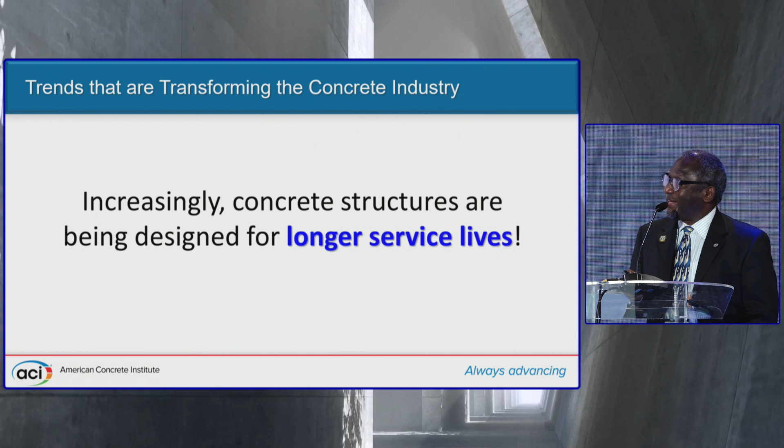So the key thing in that particular situation is we need to make sure these structures are durable, because durability essentially implies that we would have increased service life, minimal repairs, which is very critical, and also that implies a reduction in the use of natural resources.

We look at the depletion of sand, for example, in India. We heard yesterday morning during the keynote presentation that there's a depletion of sand in India, but they still have to make concrete, so they need to look at other ways of doing so.

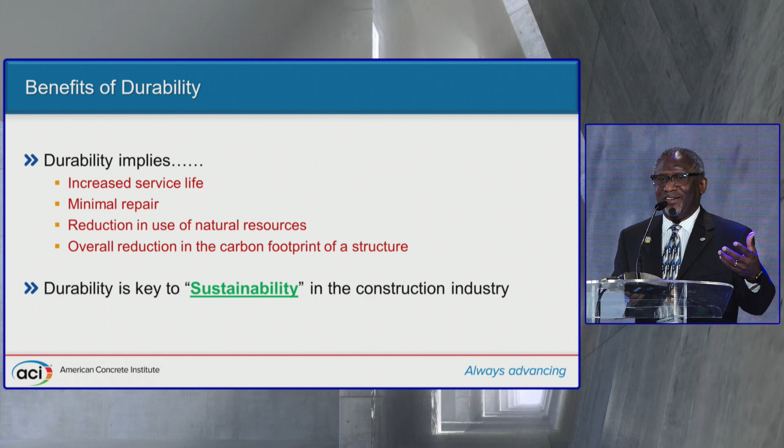The bottom line is what we're aiming for is an overall reduction in the carbon footprint of a structure. So essentially, durability is very key to sustainability in the concrete industry. I think this has pretty much been what you've heard over the past two days, because I remember very well Dr. Akio Kasuga basically said the same thing two days ago, and then we had the same thing yesterday.

So it's a common theme that you're going to hear, that durability is very much key to sustainability in the concrete industry. Now, when you talk about sustainability, it means a whole lot of things to different people. For us as engineers, we focus on durability, but then there are things that we have to be aware of in terms of what it means to other people outside of our circles.

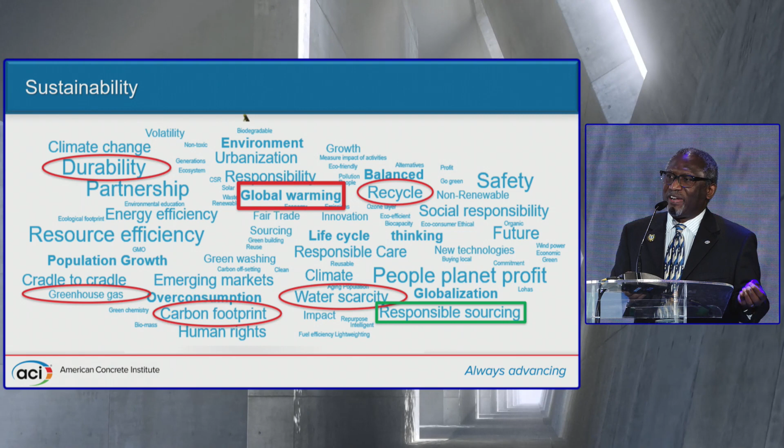Global warming is one of the things that a lot of people equate sustainability to. Greenhouse gas emissions, water scarcity, recycling, responsible sourcing—these are all things that other people typically will focus on. And when we talk about water scarcity, it is a real thing.

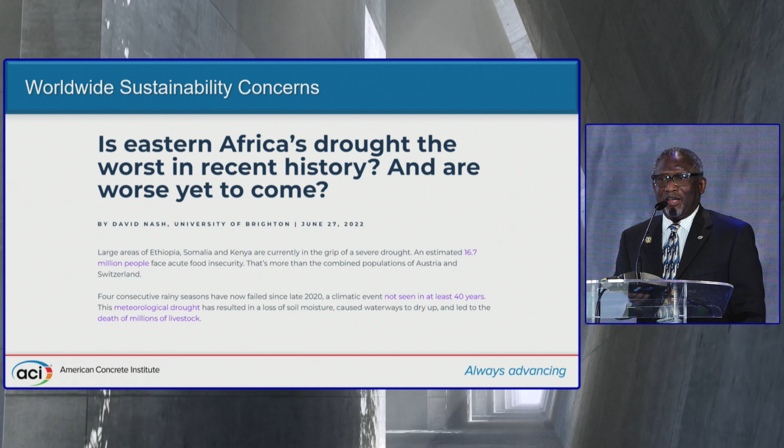This was something I just picked up yesterday—a report published back on June 27th this year about a severe drought that exists in East Africa. And it's not just in East Africa; we have drought situations in a whole lot of different places.

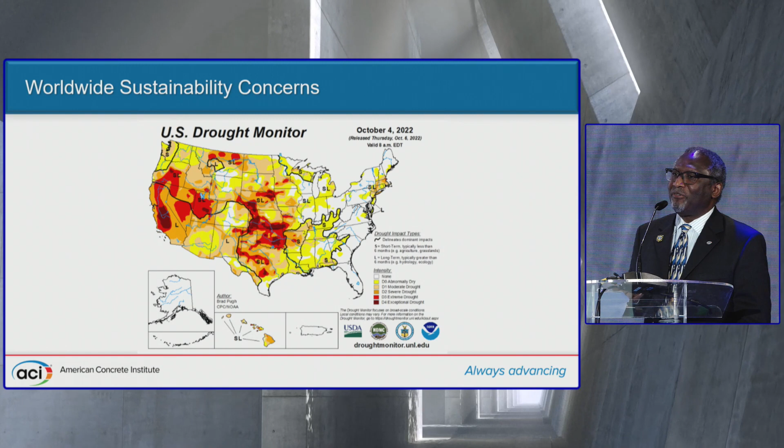Lake Mead in Nevada, for example, is at its lowest level ever, and it supplies water to a whole lot of different areas. So water scarcity is something that we should not take lightly at all.

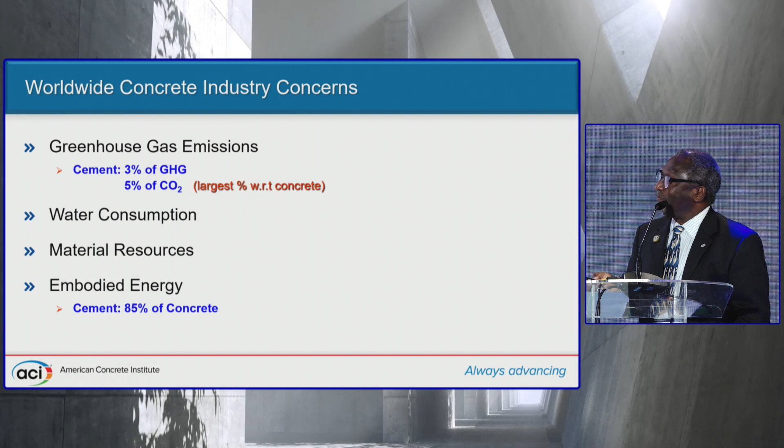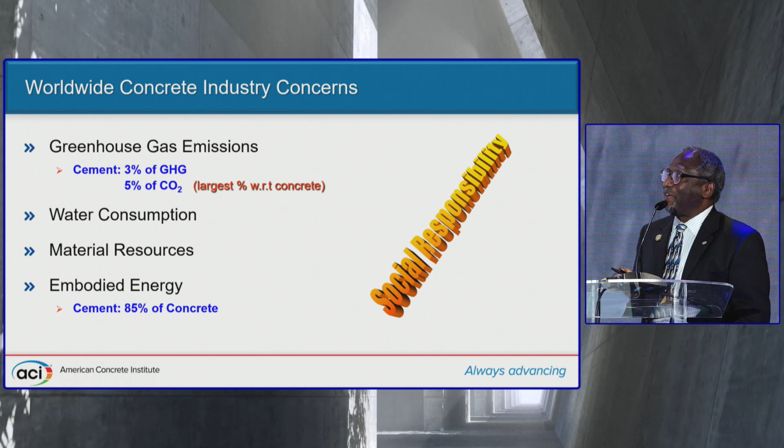Now, when we look at the worldwide concrete industry concerns, basically I group them into these four: greenhouse gas emissions, water consumption, material resources, as well as the embodied energy of concrete. Those are some of the main concerns currently. And along with that, we have a social responsibility to use materials and to use concrete in a very sustainable way as much as possible.

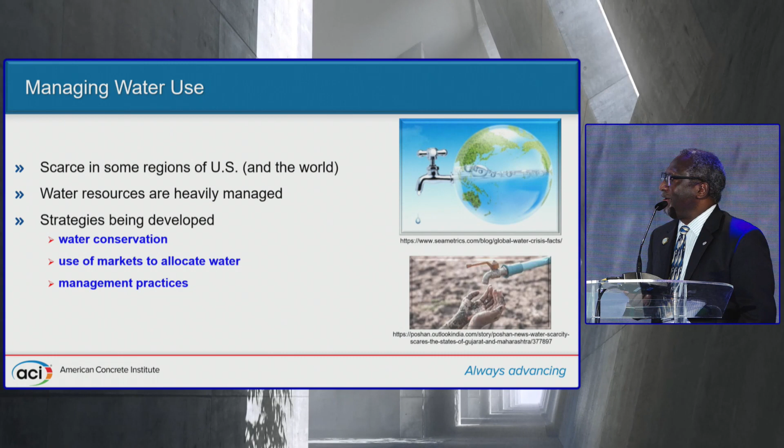Now, I talked about managing water use and the scarcity in some regions. As a result, there are strategies that are being developed for water conservation. In some places, like California, for example, they cannot use water to water their lawns, mainly because of the water scarcity. So these are things we need to be aware of.

Now, here's the good news: the concrete industry has actually been doing quite well when it comes to this, mainly through the use of superplasticizers or high-range water-reducing admixtures.

Now, this was an analysis that I did way back in 2008. I haven't bothered to update it—it will be even more profound if I were to extend it to 2022. But what I ended up doing was essentially a calculation on the mix water savings that we get from using high-range water-reducing admixtures or superplasticizers.

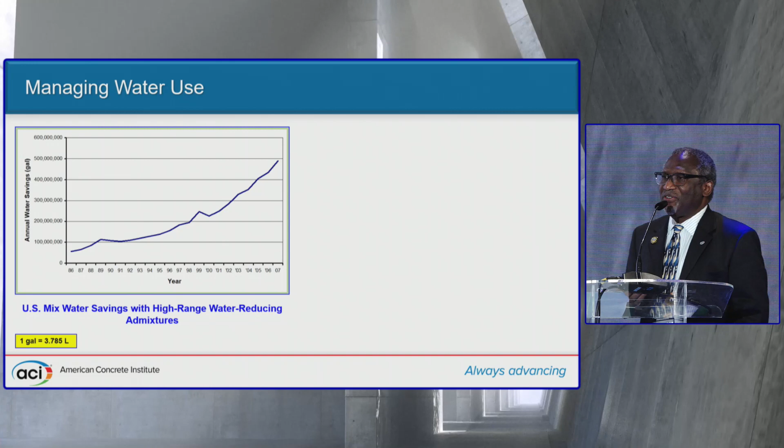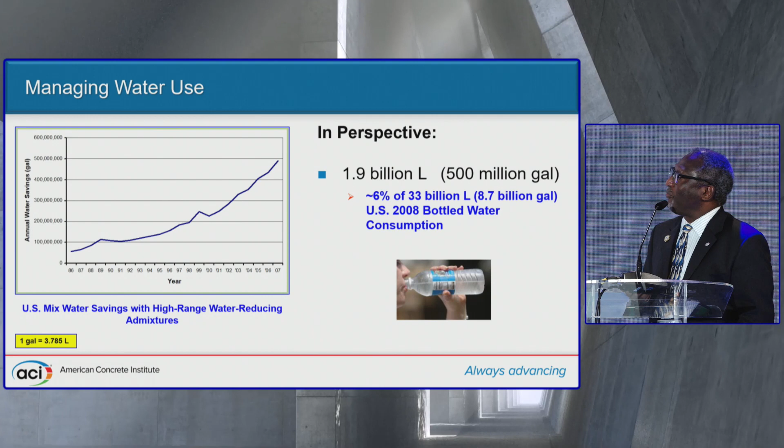And it's quite significant. The annual savings was approximately 1.9 billion liters, and back in 2008 that was about 6% of the 33 billion liters of bottled water consumed in the United States. That's quite a bit. Cumulatively, if I look at the analysis from 1986 through 2007, that amounts to about 17.4 billion liters, or approximately 53% of the bottled water consumption back in 2008 in the United States.

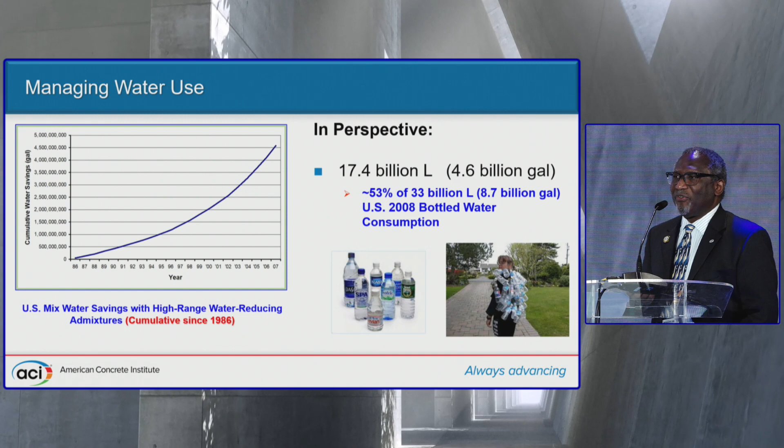Now, if we were to do this globally, it would really be an astounding number. So that said, water-reducing admixtures essentially help enable the judicious use of one of the most precious natural resources in the world, which is water. And that's being socially responsible.

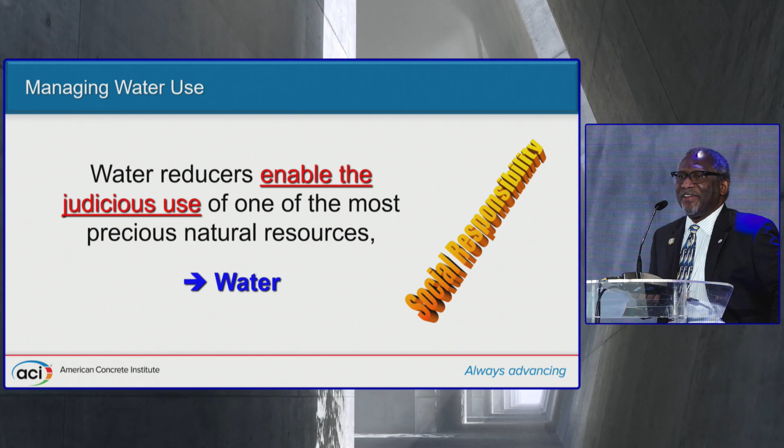So in as much as people talk about concrete being a bad animal sometimes with respect to carbon emissions, we have to be proud of the fact that we are doing some things that are actually also helping society.

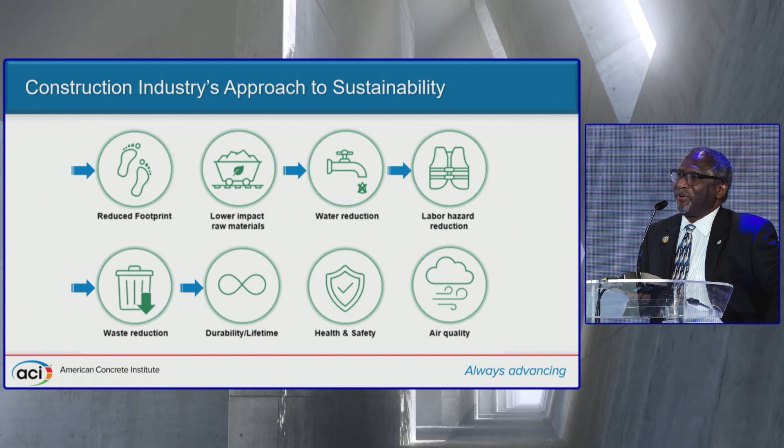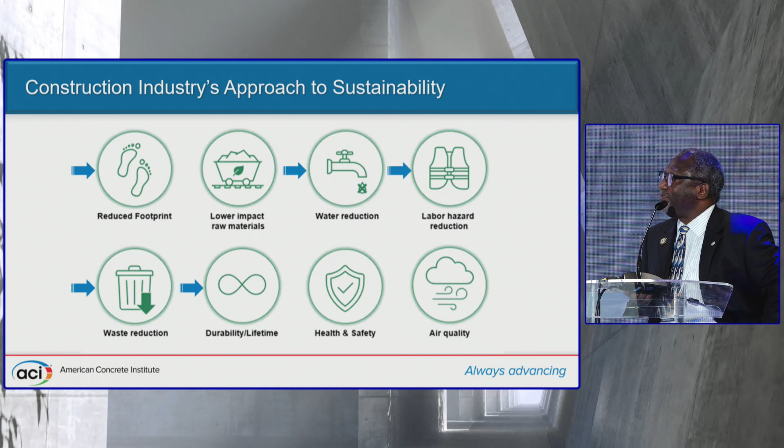The construction industry's approach to sustainability typically focuses on several key buckets. Obviously, reducing the carbon footprint of concrete is one of the key things. Another is using lower impact raw materials so we don't deplete natural resources. I already talked about water reduction. Things such as labor hazard reduction are also very critical, making job sites safer for workers, reducing waste, and obviously durability over the lifetime of a structure, as we've been talking about over the past couple of days. Other things such as health, safety, and air quality are also very important.

With all of this, there are different options. One of the things we have to be very careful about is something called greenwashing, which is when people make claims that cannot be substantiated. So when it comes to sustainability, one of the things we have to do is be able to quantify whatever claims we're making.

Life cycle assessment typically looks at the environmental portion, but in order to incorporate the economic portion, we normally would go to eco-efficiency analysis. So it's a more comprehensive way of doing it.

One of the things going on currently in terms of being able to quantify or look at different alternatives is environmental product declarations, or EPDs. These EPDs are nothing more than the equivalent of nutrition labels for concrete. Right now, when you go to the supermarket and buy a box of cereal or some canned produce, they have a nutrition label on it. It's exactly what we're doing here with concrete.

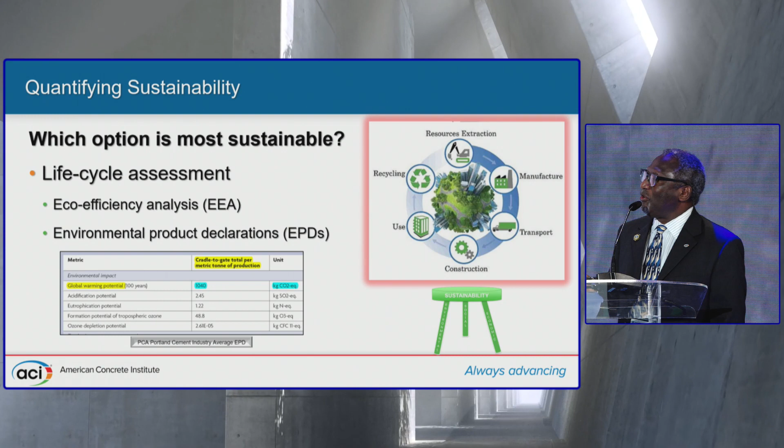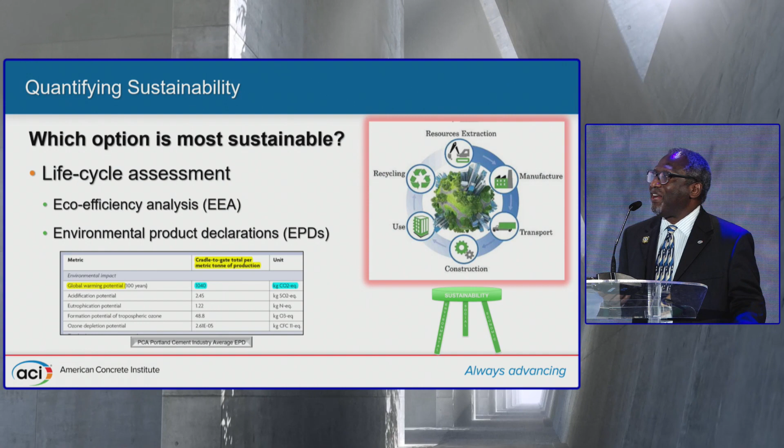But instead of things such as calories and so on, we have global warming potential expressed as kilograms CO2 equivalent, and things such as acidification potential, eutrophication potential, and so on. This is something that as engineers, we need to be aware of in terms of the quantification of sustainability.

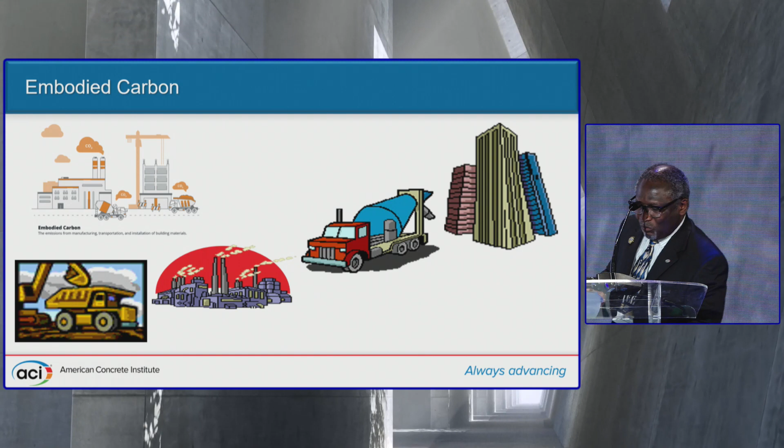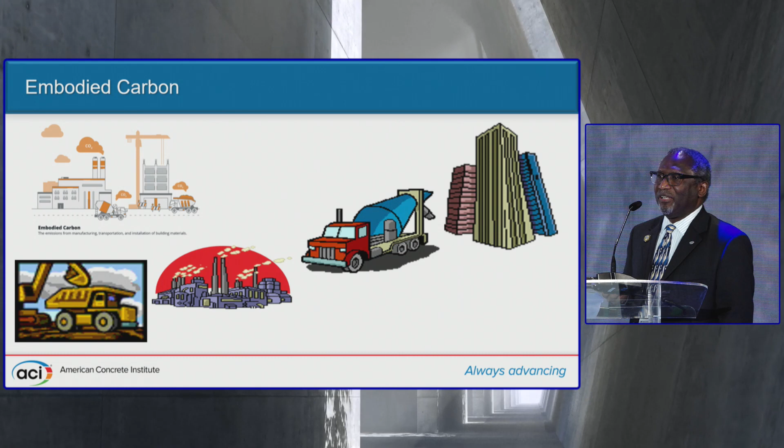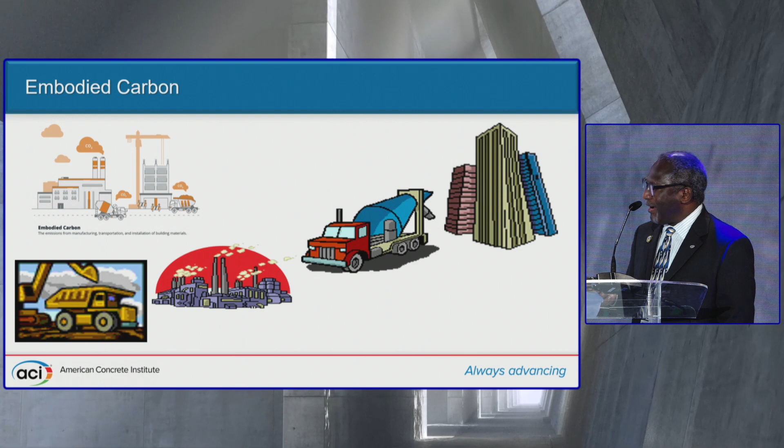We've heard talk about embodied carbon as well as overall carbon. Embodied carbon is essentially the emissions that arise from the extraction, manufacturing, transportation, and installation of building materials. In a very pictorial sense, this is what embodied carbon entails - everything from extraction, the energy associated with extracting materials, all the way through the construction of the building.

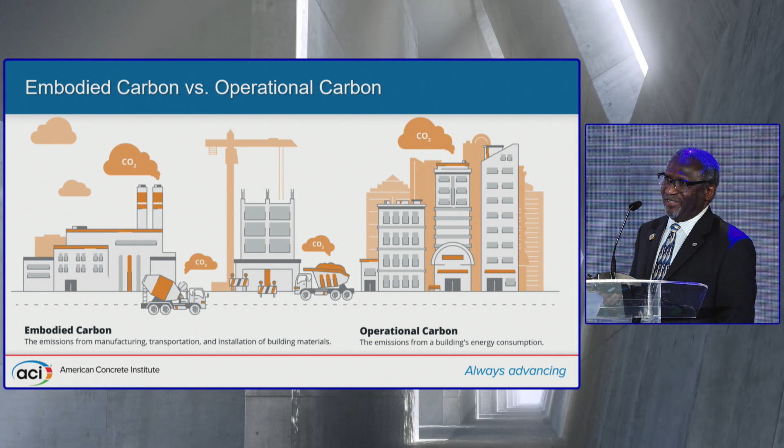Along with that, as Dr. Akio said a couple of days ago, we also have operational carbon. He basically took us through the cost of all of that. That is the carbon associated with emissions from a building's energy consumption.

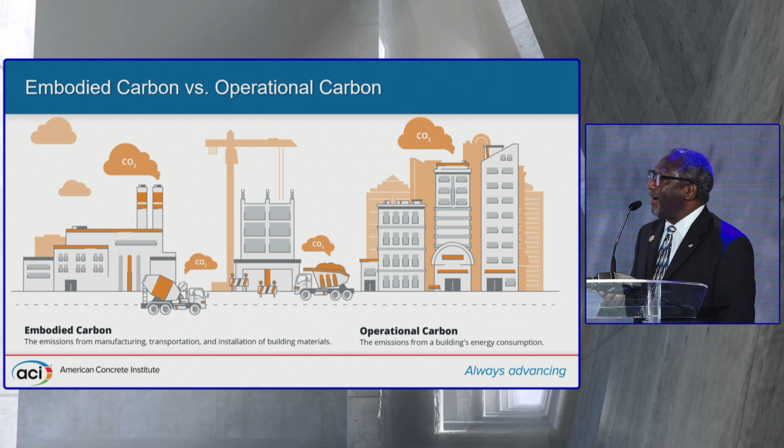We found out yesterday, typically people will do analysis from cradle to gate, or you can have cradle to cradle, so it depends on how the analysis is done. Most of the analysis typically would not include the operational carbon, just the embodied carbon associated with the particular structure.

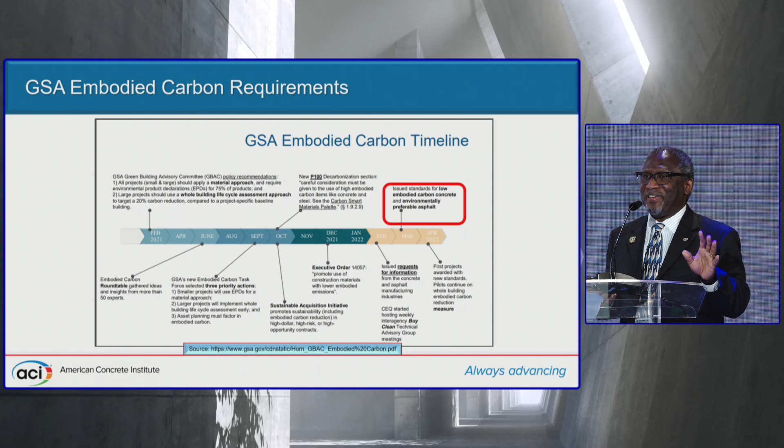Now, why is this important? The General Services Administration, the GSA in the US, basically controls or sets policy for all government buildings. In March of this year, they issued standards for low embodied carbon concrete and environmentally preferable asphalt. So what we have now is a situation where the government is telling us exactly what we want to do. And that's where we don't want to be, because they will set limits that might not be what we actually want.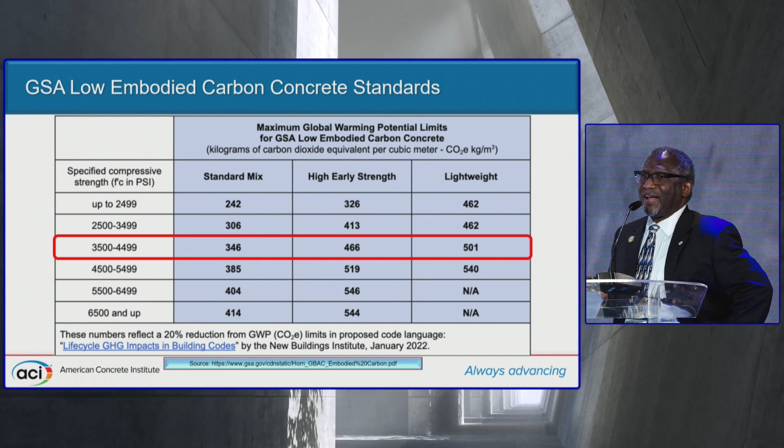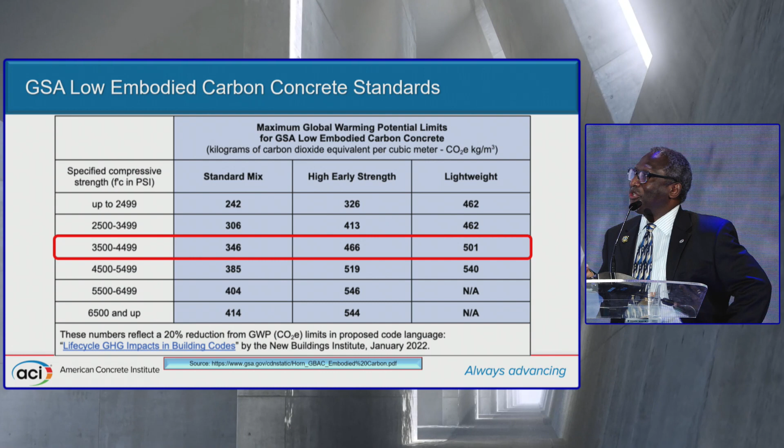The contractor is responsible for making sure that the concrete mixes used in the projects will meet these limits. And what do you think is going to happen? The contractor is essentially going to pass it on to the concrete producer.

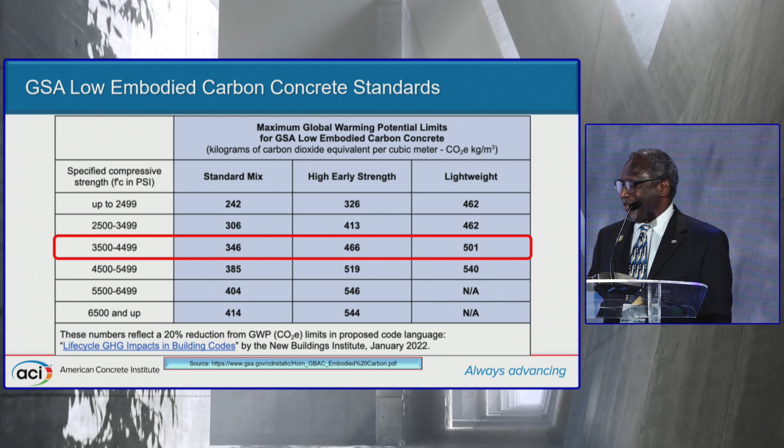I just wanted to make you aware of some of the things happening around the world. I'm not quite sure what's going on in Brazil, but don't be surprised if these things start coming up. So proactively, the question is, what is the concrete industry doing? Because we don't want a situation where we're forced to do something, so we have to take the lead.

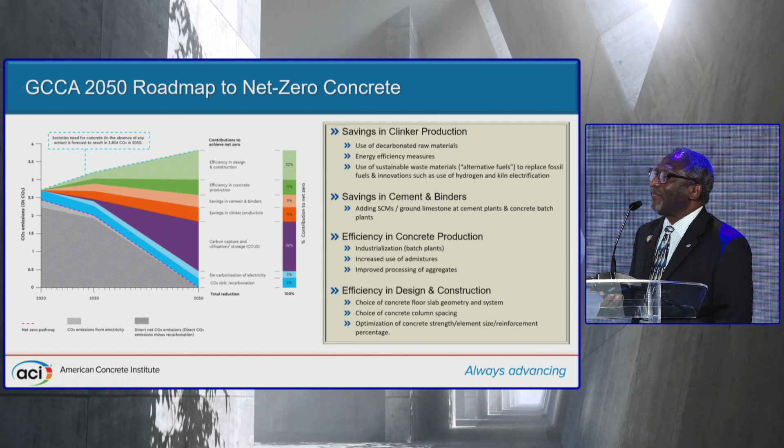With respect to efficiency in design and construction, this essentially goes to structural engineers: the choice of concrete floor slab geometry and system, choice of concrete column spacing, optimization of concrete strength, element size, and reinforcement percentage. These are things that fall in the lap of structural engineers.

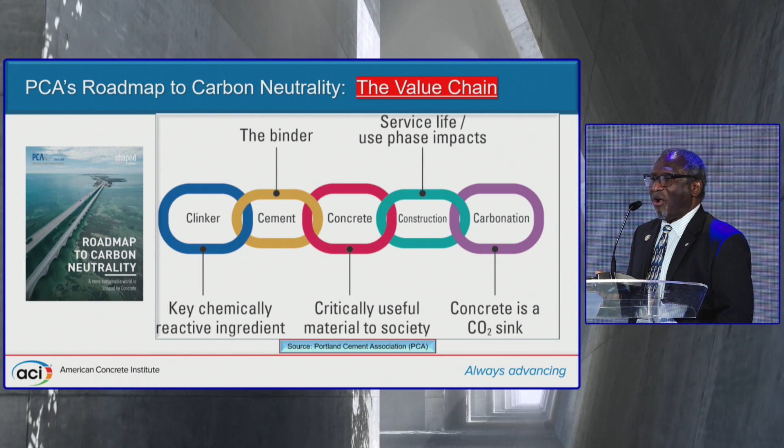The Portland Cement Association, PCA, in the US also has a similar roadmap, much like the one from GCCA, but they call theirs the value chain, the 5 C's: clinker reduction, optimization of cements, concrete, construction, as well as concrete as a carbonation sink.

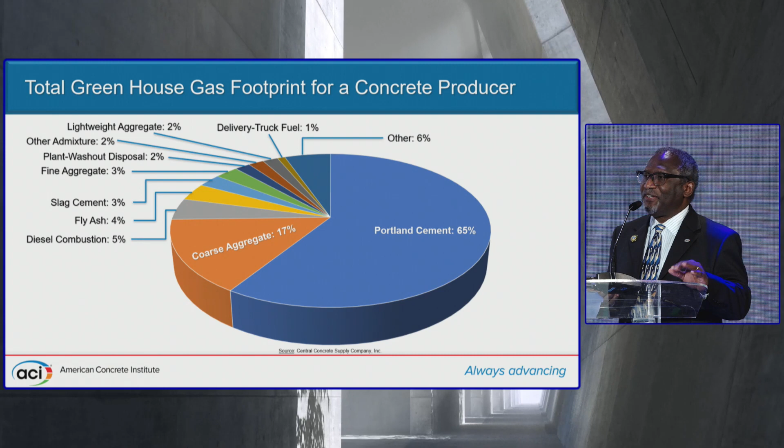Proactively, one of the prominent concrete producers in Northern California got a consultant to analyze their operations and come up with the carbon footprint of their operations. To no surprise, they found that 65% of their carbon footprint is due to the Portland cement, another 17% is due to the coarse aggregates, and the rest of the contributors are all in the single digits.

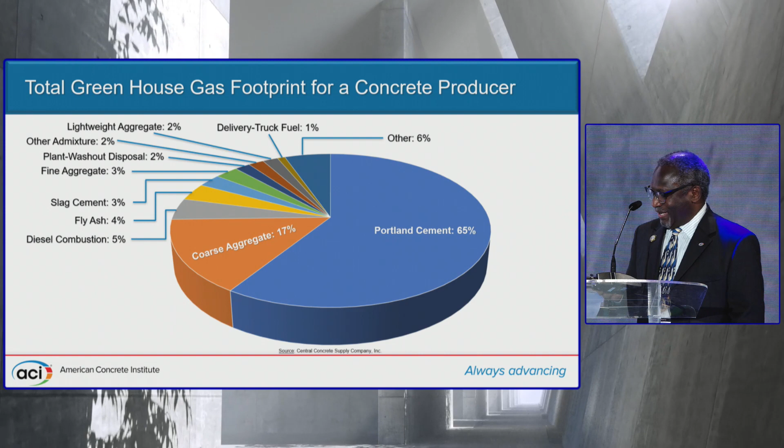Now, what does this mean? Essentially, if we want to reduce the carbon footprint of concrete, we need to look at ways to reduce the clinker factor, or how much cement we're using.

A couple of days ago, Dr. Akio talked about the geopolymer they've devised, where they're using silica fume, slag cement, and fly ash in their geopolymer concrete mixtures. But these are the things that are available, and we have some other materials as well that are coming on the scene.

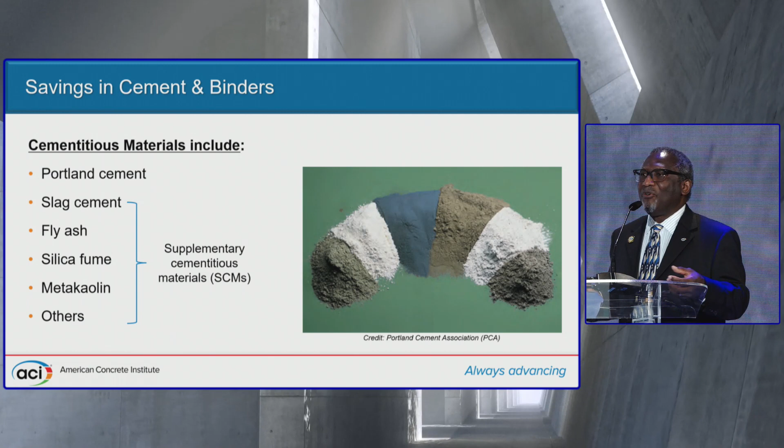Such as ground glass as a pozzolan. So all the beer bottles and liquor bottles that typically go to the landfill are now being harvested and ground into a fine powder, and that material is extremely high in SiO2 content, similar to silica fume.

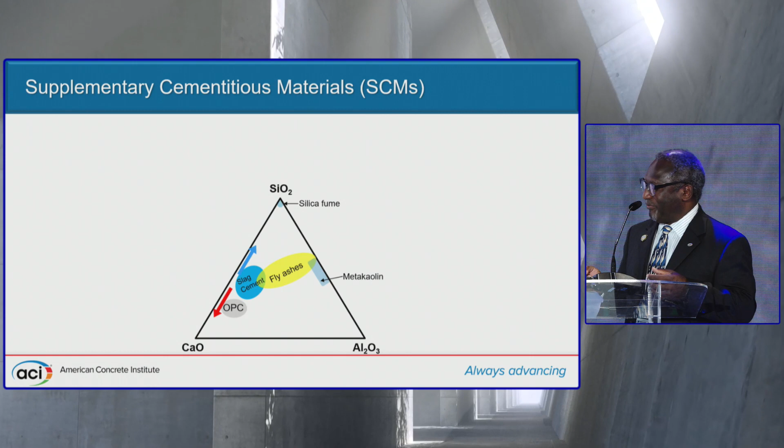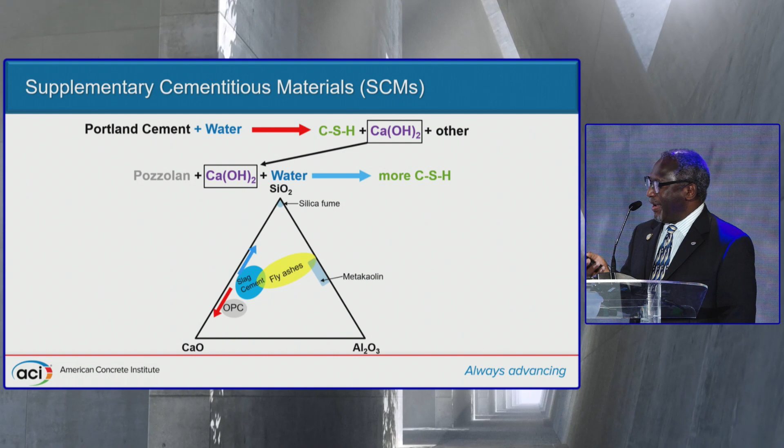As a result of that, it's able to function very much like a pozzolan, and pozzolans, as we know, help to improve the concrete matrix through the formation of additional calcium silicate hydrate gel. So all of these materials are very, very beneficial.

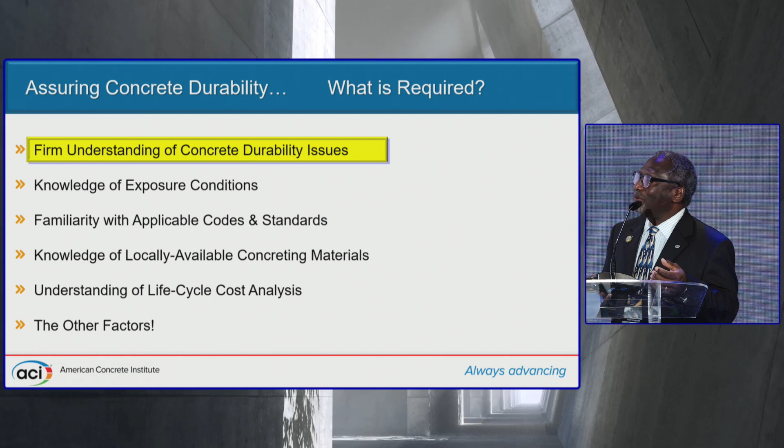Now, this is one thing that I feel very strongly about, and that is, how do we assure concrete durability? From my perspective, I've broken it down into 6 different categories, starting with having a firm understanding of concrete durability issues, knowledge of the exposure conditions, familiarity with applicable codes and standards, knowledge of locally available concreting materials, understanding of life cycle cost analysis, and then what I term the other factors.

So let's take a quick look at some of these things.

Knowledge of the exposure conditions. As civil engineers and designers, we have to be aware of the exposure condition, because then we know exactly how to not just focus on strength, as we had yesterday, but then look at the durability aspects of things.

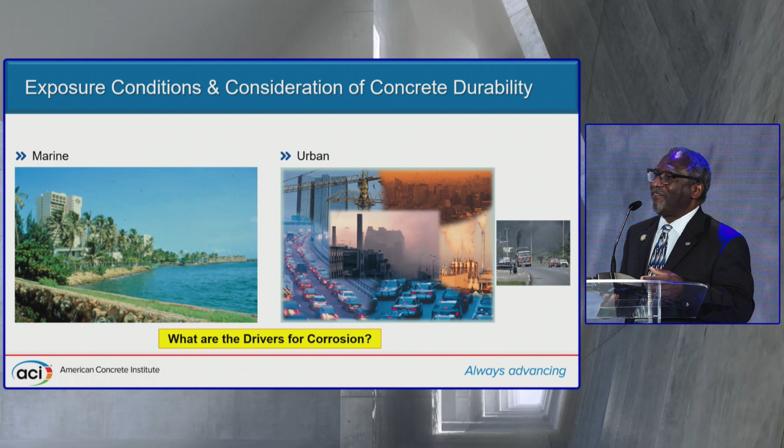Is it close to a marine environment? Is it in a heavily populated area where we have a lot of industrial pollution? Because those are two different things. In one case we have exposure to chlorides, in the other case we have carbonation of the concrete that can also lead to corrosion of the reinforcing steel.

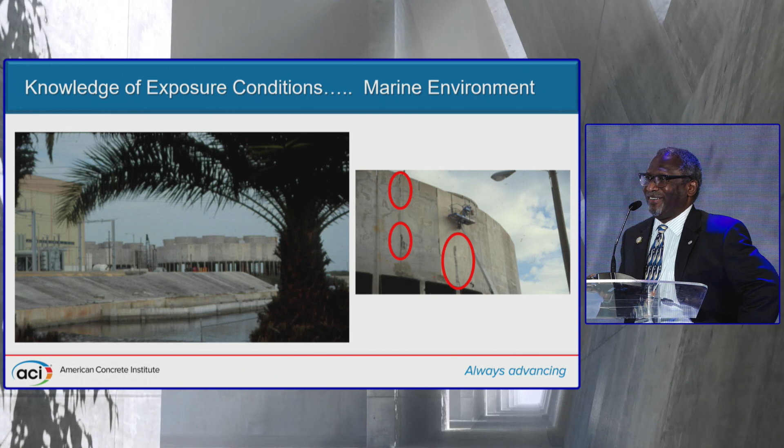This was a cooling tower that I worked on, back in the early 2000s, off the coast of Tampa. At the time when I was there for these repairs, the cooling tower was only about 5 years old, and they had to shut it down for repairs. It's difficult to see here, but all of the columns were badly corroded - you can see some of the corrosion that has already occurred. Within 5 years it had to be repaired. Why was that? They were using seawater as a cooling medium, laden with salt, and that was not taken into consideration in the design of the cooling tower. This is where we have to be aware of where the structures are going to be.

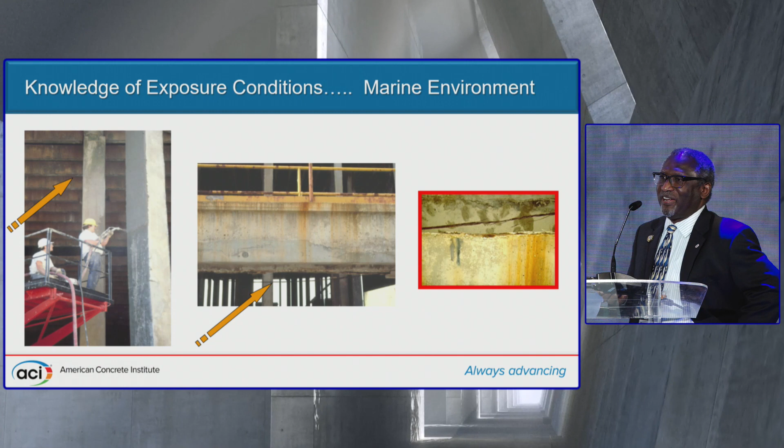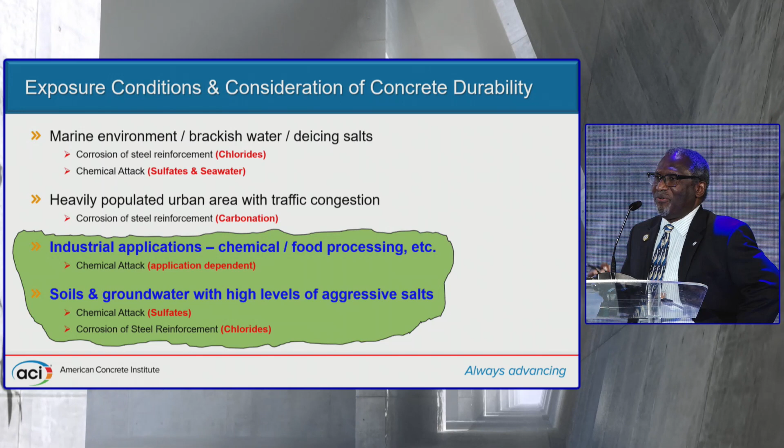Other things we need to be aware of - it's not just the marine environment or carbonation-induced corrosion, but also industrial applications, chemical and food processing plants, where chemical attack, depending on the specific application, can be very severe. Also soils and groundwater with high levels of aggressive salts - we're talking about either chemical attack from sulfates, or corrosion of steel reinforcement. This is why we need to have knowledge of the environment.

Familiarity with codes. Most building codes around the world now include sections on durability, maybe pirated from one country or another. In Brazil, you have NBR 6118, so you should be familiar with that. Paulo Helene was very instrumental in working on the durability portion of that as well.

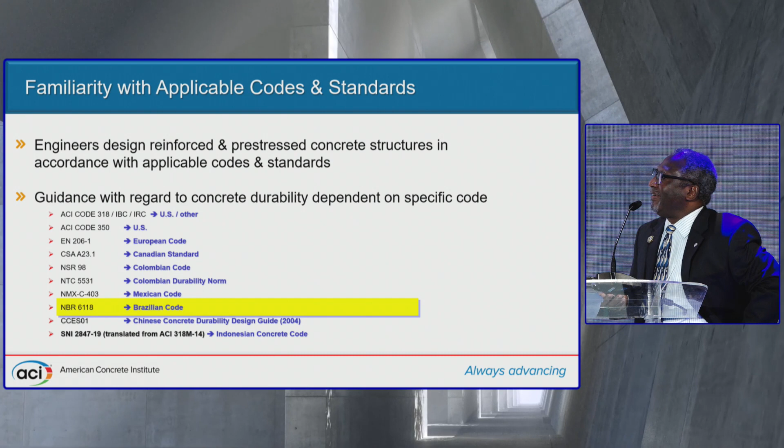Other things - knowledge of locally available concrete materials. How many times do structural engineers take time to find out what's available by talking to their material suppliers? Typically they don't. But producers need to know what concrete materials are locally available, which can be obtained with relative ease. Design engineers need to know the limitations of locally available materials through consultation with material producers, because that tells you what you can use and what you cannot use.

In North America, in the US, in some places we don't have fly ash or we don't have slag. So those are things we have to take into consideration when we're talking about durability, designing for durability - what is locally available, what can be used.

Hawaii, for example, has a lot of durability issues mainly pertaining to corrosion. However, they don't have any pozzolans. They have silica fume, which is very expensive. Fly ash is cheap in a lot of places, and slag cement is relatively inexpensive compared to Portland cement. However, in Hawaii, fly ash and slag cement cost more than Portland cement.

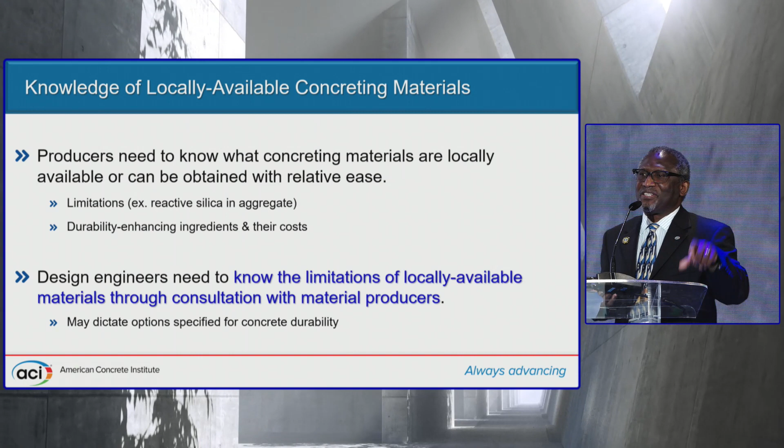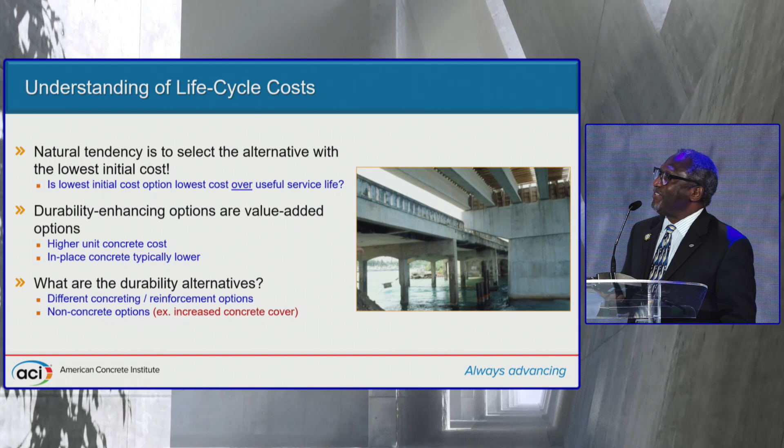So how do you end up with low embodied carbon concrete when you're actually going to make the cost of the concrete more expensive? You violate one of the legs of sustainability. And then, understanding of our life cycle cost - this was a picture of a bridge that I took in Puerto Rico. It was...